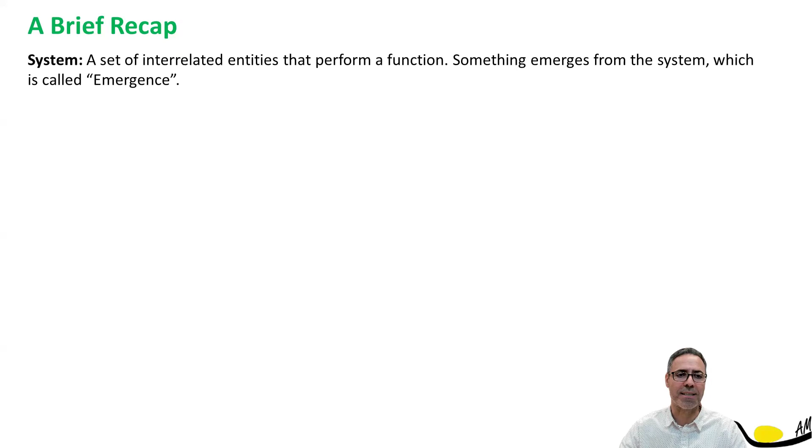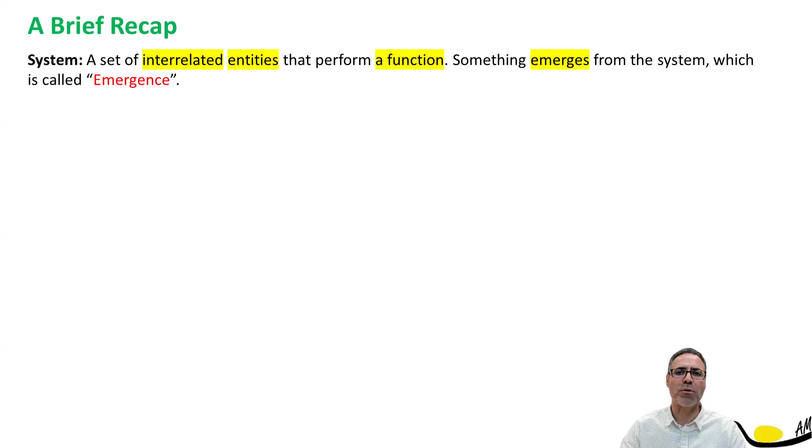Previously, we defined a system. Simply, a system is a set of interrelated entities and components that perform a function. The system does something, something emerges from the system, which we call an emergence. Pay attention to every word in this definition: a set of interrelated components or parts or entities that perform a function, and something comes out of the system, which we call an emergence.

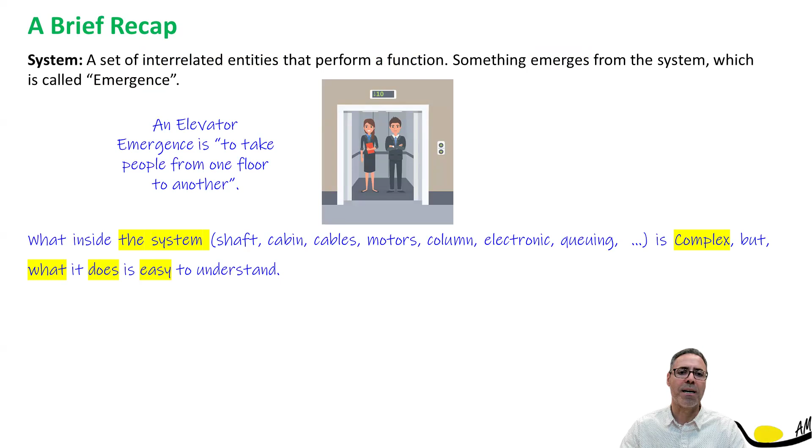A simple example is an elevator. An elevator simply is some components like a shaft, cabin, motors, column, cables, and so on. It's a complex system, but it does something which we can understand easily. The emergence of this system is to take a person from one floor to another.

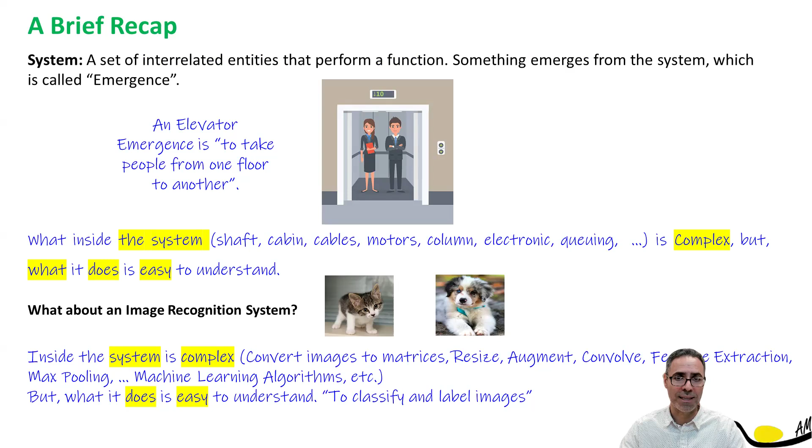Think about a system like an image recognition system. It can recognize cats and dogs images and label them for you. What it does is very simple, to label the images, but what is inside this system is complex. If you've learned machine learning, you know you need to apply convolutional neural networks to do the image processing. There is some math and some machine learning algorithms. But what is important for us is to understand easily what this system does, and later we'll focus on the component that performs that function for us.

But the more important question is, what drives these changes? Perhaps safety, maybe the need for better performance, or maybe new technologies and materials drive us to design a bicycle which is more efficient, perhaps lighter with better and stronger material.

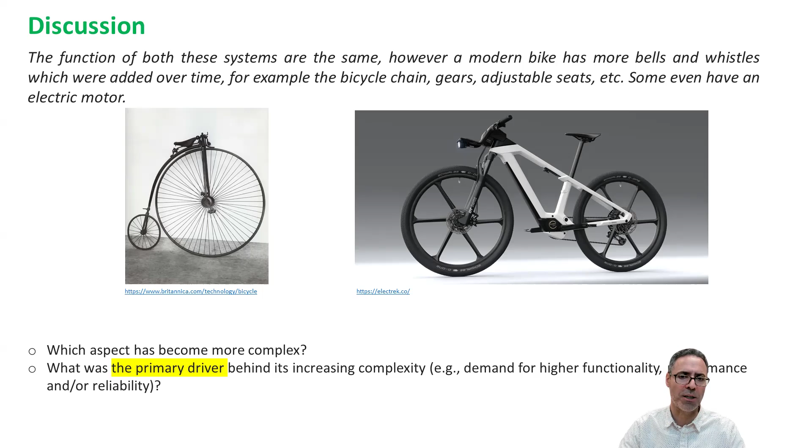Now, can you think about a system that became more complex, and also think about what made it more complex, or what is behind its increasing complexity? I can think about a calculator. The calculator used to do just simple arithmetic, but over time it became more complex. Now they do graphs, trigonometry, and some of them even connect to the internet. I remember my father used to have one of these old calculators and he was happy with that.

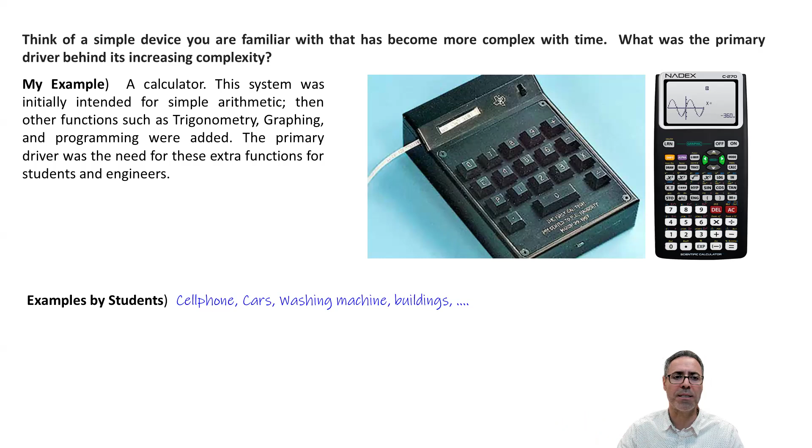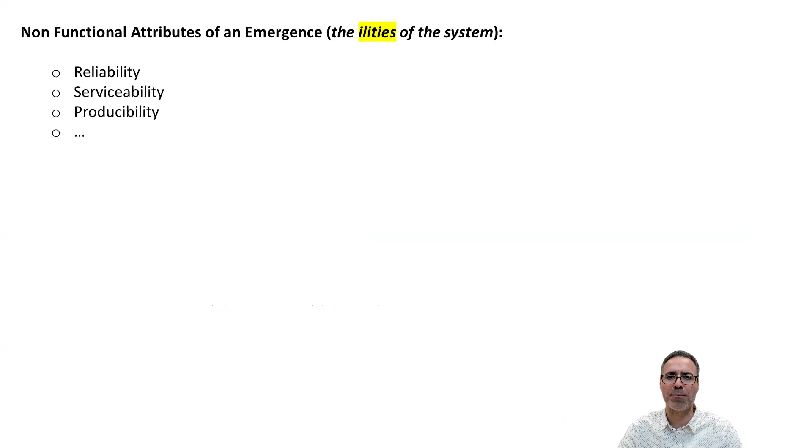So we say there are some 'ilities,' perhaps reliability, serviceability, producibility, and maybe many other ilities, which refer to non-functional attributes that drive us to develop more complex systems.

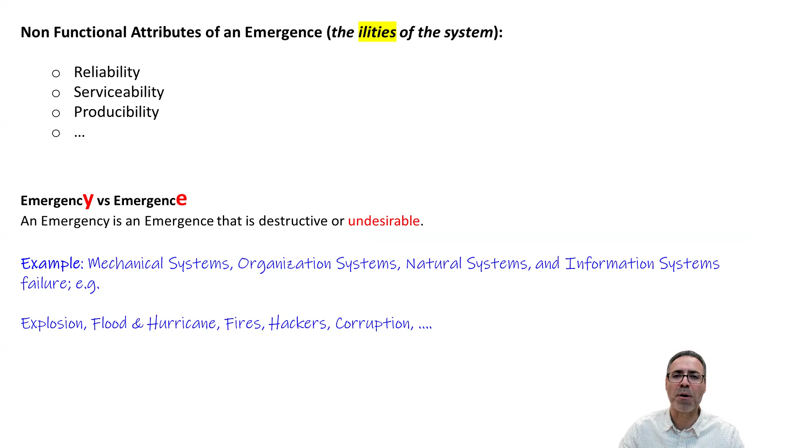Also, sometimes an emergence of a system is something undesirable. We call it an emergency, like an explosion, a fire, or a flood. These are all emergence of a system, but they are not desirable emergence. We call them emergency.

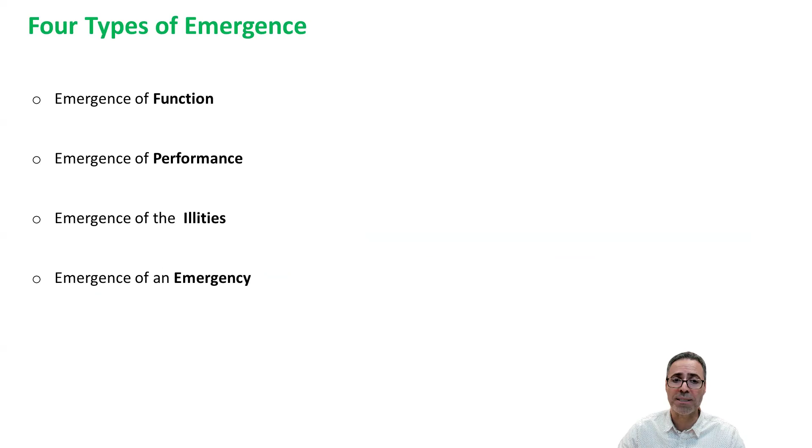So we can summarize, there are four types of emergence coming out of a system: emergence of a function, emergence of a performance, emergence of the ilities, and an emergency. Emergence of a function is what the system does. Performance is when the system does something better than before. Ilities are non-functional attributes like producibility, serviceability, or maybe many other ilities that you can think about. And an emergency is something undesirable.

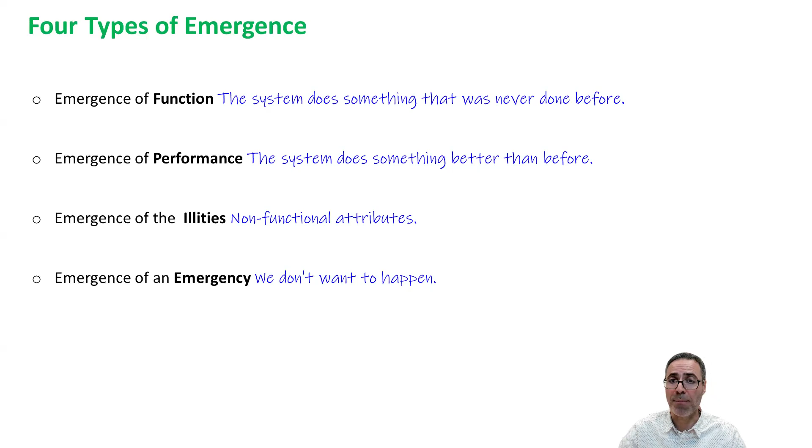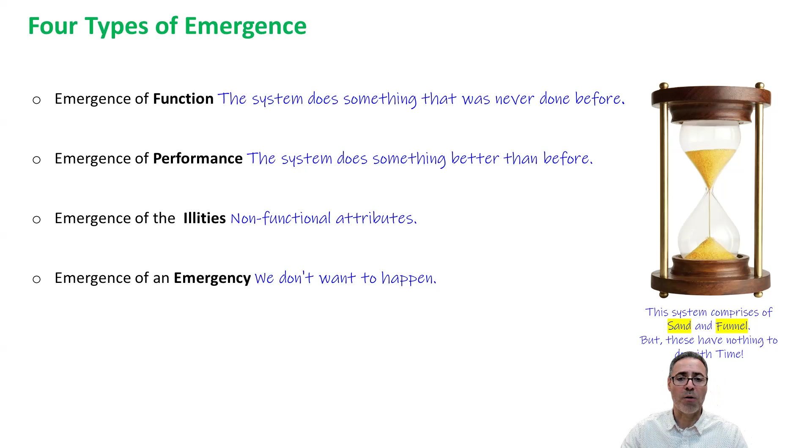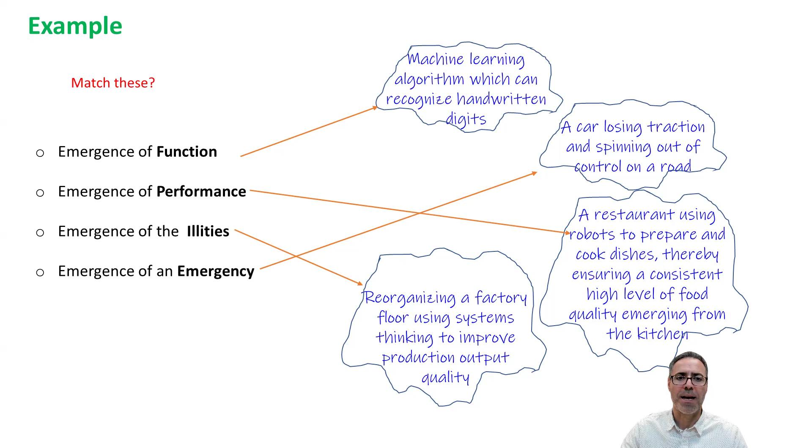Perhaps you can pause here and match any of these four types of emergence to one of these examples. As an emergence of a function, the machine learning algorithm. Performance, a restaurant which uses a robot. Ilities, a factory that uses systems thinking. And an emergency, a car which breaks.

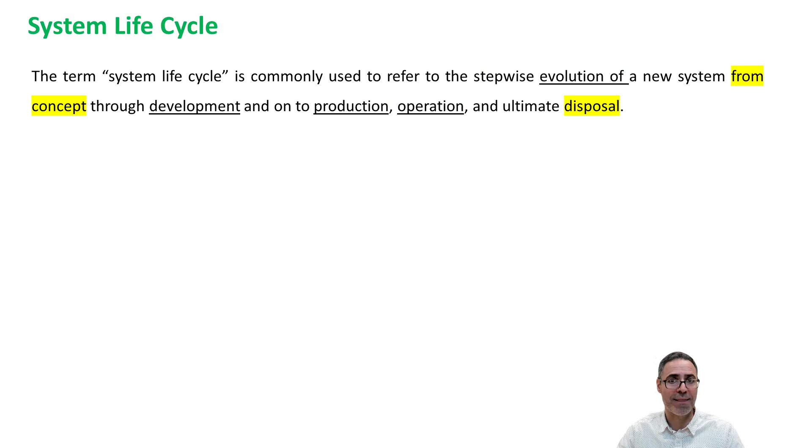Now we're going to look at the system lifecycle, and we're going to come up with models that make a systematic way to model a system from concept all the way to the end, to disposal. So going from a need, convert it into a valid need, develop a concept, then do the design and development, manufacturing and production, operation, launching, upgrading, and at the end, the end of life of a system.

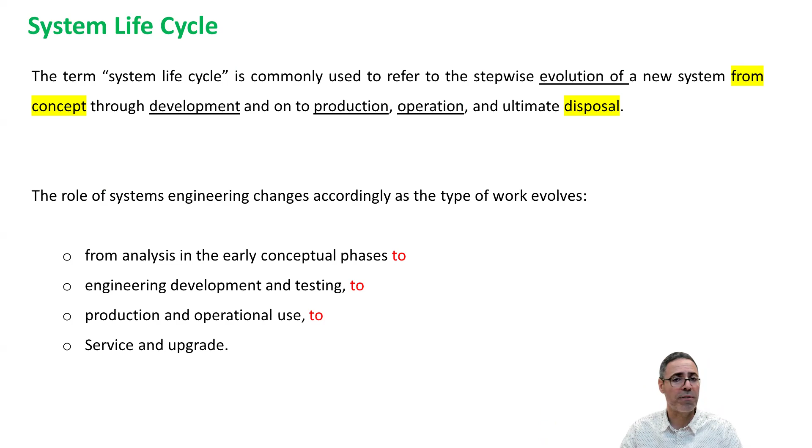The role of a system engineer changes at each of these phases. In the conceptual phase, you need to do the analysis. Going to the engineering development and testing, the focus changes and switches to design development and testing. And at the end, the focus of the system engineer changes to service, updates, maintenance, and others.

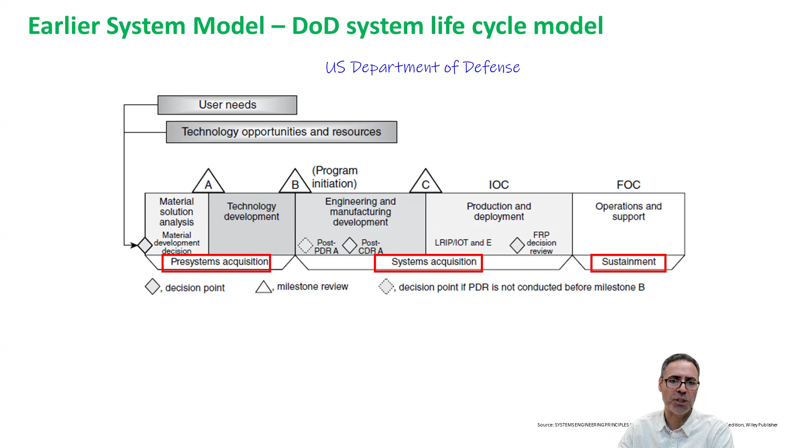The triangle shows the milestones and the diamond shows the decision points. There are some acronyms, as shown at the bottom, like PDR, the preliminary design review, the critical design review, and so on. This is a good model that you might adapt for developing any system, and it's easy to understand.

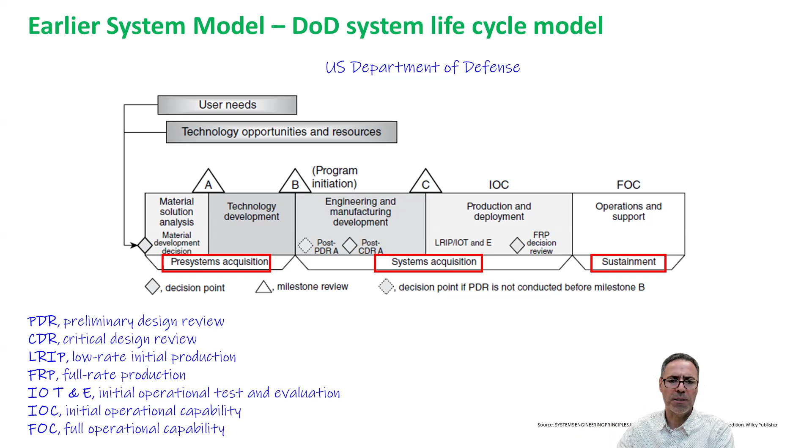But today we are going to focus more on what's a common system development model, or system development life cycle, which has three main stages. The first stage is concept development. The outcome of this stage is to develop a concept to satisfy a valid need.

Moving on, the second stage is design and development, or the engineering development. The outcome of that is a validated physical system design - something where we've done the detailed design, done the tests, and validated it. So we are ready to move to the third phase, which is production. We manufacture the system, launch it, deploy it, and then provide maintenance, updates, and other services required for the system.

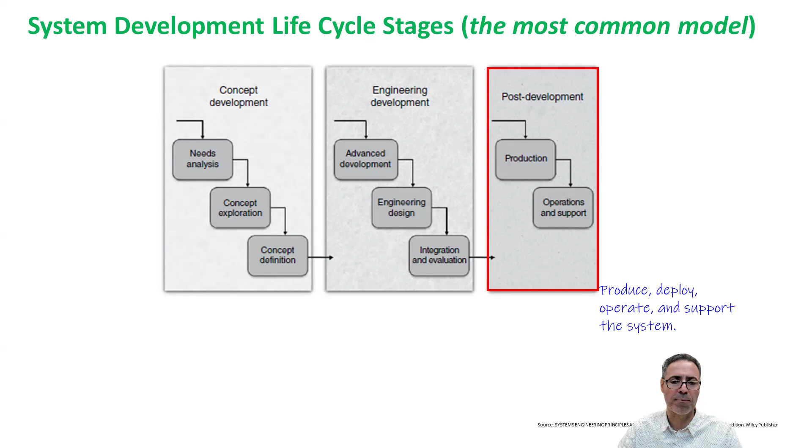Another way to look at those three phases, which we refer to as principal stages, is shown in a diagram like that. So we see the concept development, the engineering development, and the post development - the three main stages or principal stages.

Look at the arrows at the top. Those arrows show the flow of information. They start with the need and move to the functional specification, then production specification, and then some documentation regarding maintenance and so on. The arrows at the bottom show the steps going from an opportunity, or a concept, all the way to a physical actual system that operates.

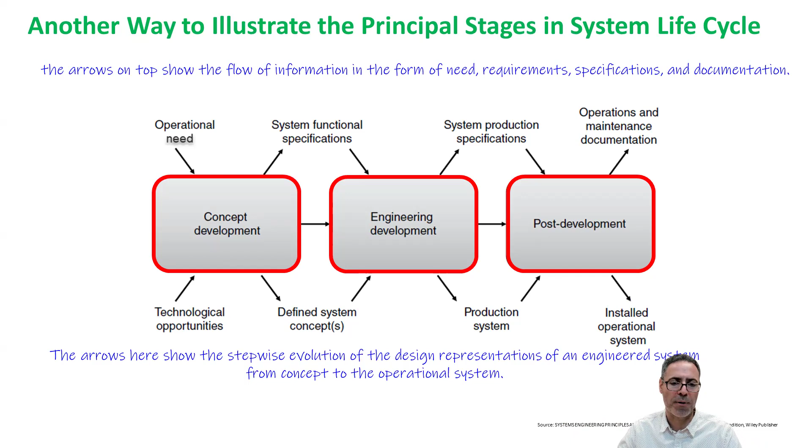Let's look at one example. Let's say there is a need for a new commercial aircraft. Perhaps we need an aircraft that moves faster, or maybe a new technology is available - a new material, or perhaps a new engine.

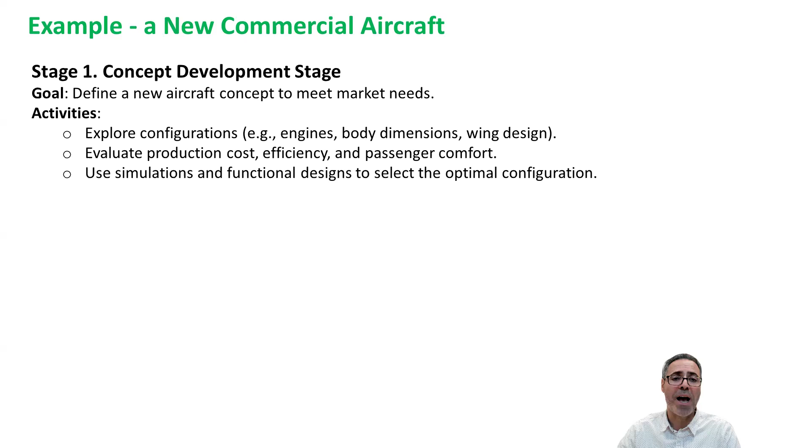So there is a need to develop a new aircraft. Stage one is the concept development stage, so we define a new aircraft concept to meet the market needs and requirements. Our activity here is to explore different configurations - the number of engines, the size, the shape of the wings. Also, we need to evaluate the cost of production, the efficiency, the passenger comfort, and maybe do some computer simulation and 3D modeling. Let's say this fancy concept is the outcome of stage one.

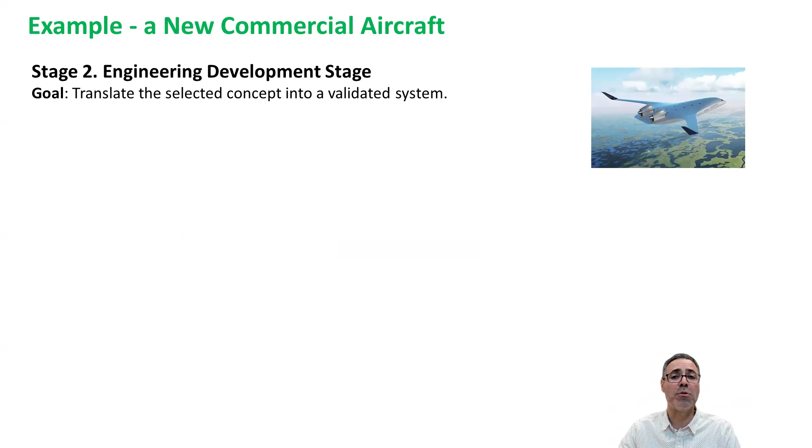Now we move on to stage two, the design and development stage. At this stage, we need to translate our concept into a validated system. It means we need to validate that the new technology works.

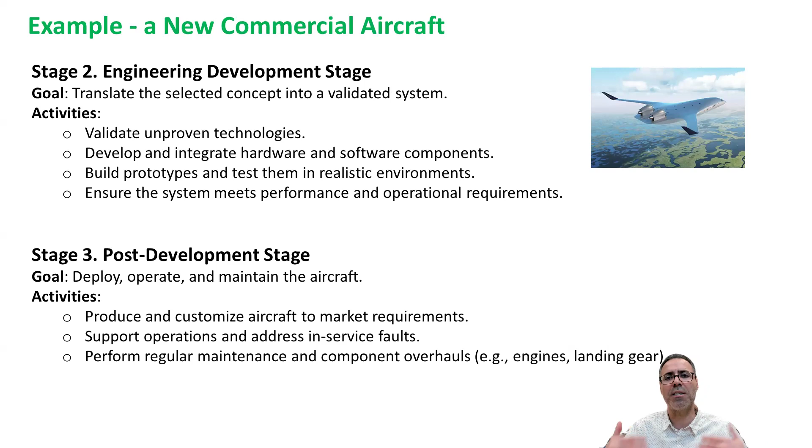We need to develop detailed designs, maybe build a prototype, and do some testing. After that, we move to the post-development stage. After we've done the test, built a prototype, and done the improvement, we deploy our product, check its operation, and check consistently and frequently its maintenance to do the upgrade and optimize the components we need. So as you see, these are the three stages for a simple example like aircraft, how it works.

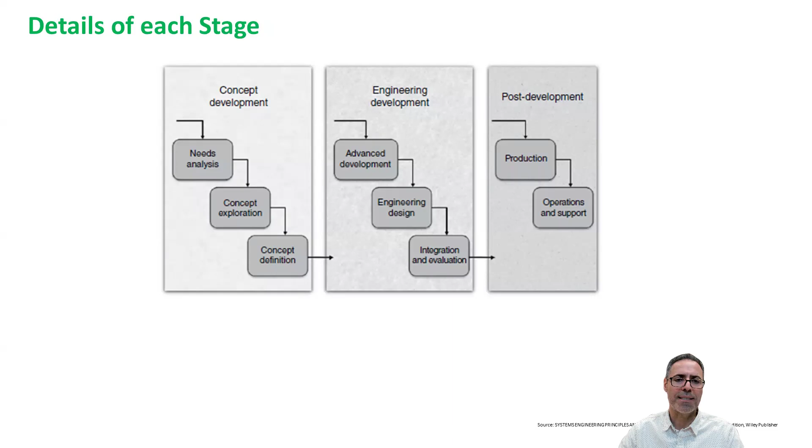Now let's focus a little bit on details for each of these stages. For the concept development, we have needs analysis, concept exploration, and concept definition. Let's start with the need analysis to make sure that the need is a true need. Then we move to different concepts - the more concepts we explore, the better. Then we narrow down our list and decide and fix on one concept.

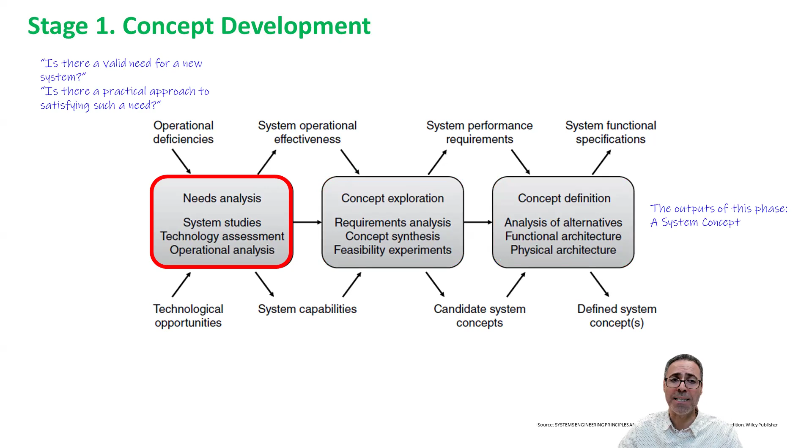So the outcome of the need analysis is to ask: is there a valid need for a new system? And if there is a valid need, is there a practical approach to it? Let's say there is a need in society for an automatic separator garbage bin. Is there a real need? Yes, there is - perhaps you are stuck in front of one of these garbage bins trying to decide which hole to put the garbage in. You have to read through and make a decision.

But what if there is a garbage bin that does all the job for you? There is just one hole, like this blue hole, and you put the garbage there and it sorts it out and puts it in the right bins. Maybe the technology isn't out there yet, and maybe one of you can start thinking about how to implement it. Should I use image recognition, where a camera takes photos and then sorts the garbage to the right bin? Or maybe a camera and image recognition isn't efficient, and there are other ways. Think about a technology that can solve this problem. So the need is there, but maybe the technology isn't yet, or maybe it is and you can think about it.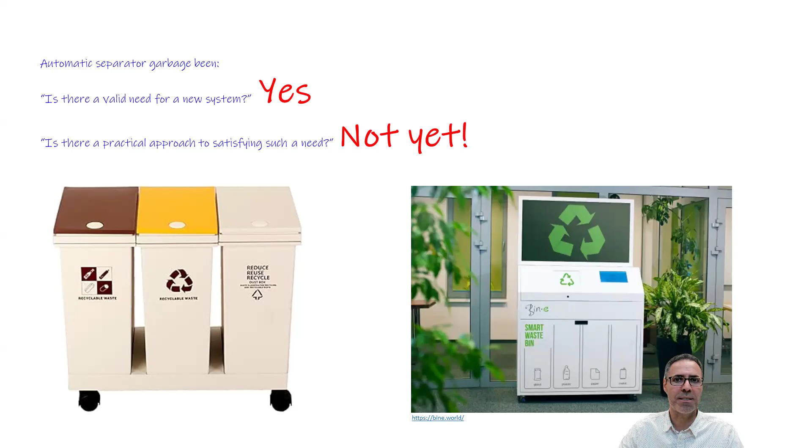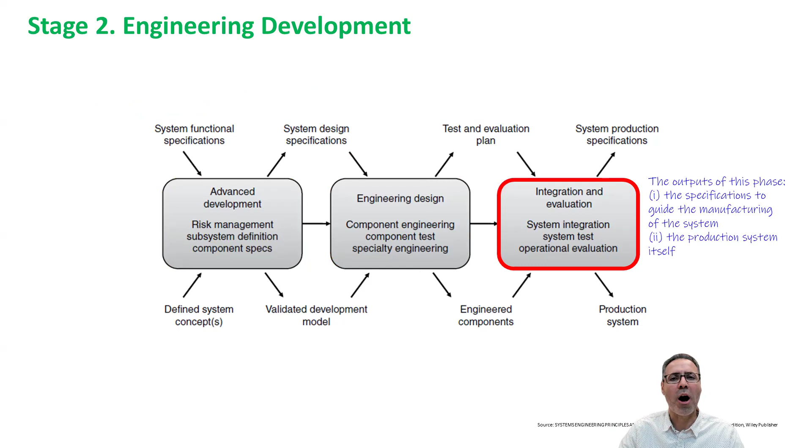Now let's move to the engineering development, the second phase. In this phase, we focus on one concept, we focus on detailed design, we build the prototypes, and we do the testing. So we do test and evaluation to optimize our design and prototype. The outcome of this phase is the specification, which guides the manufacturer to start building the components.

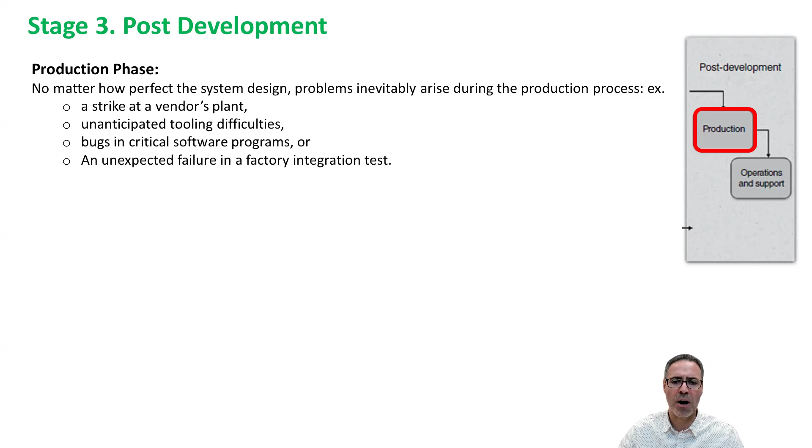Moving to the next phase, let's say we launch our product. Now it's a matter of mass production. We have to be aware of Murphy's Law - remember in lecture 1 we talked about it? Things may not go as we plan. Maybe there's a strike, an issue with tooling, critical software bugs, and many other unexpected things that can happen. I'm sure you have many examples in mind.

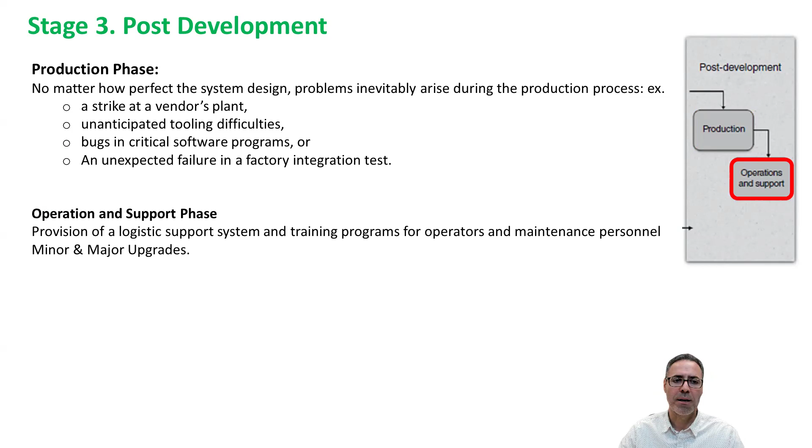Now it's the operation and support phase. We need to think about the service, and we need to think about some minor or major upgrades that our system needs. Now we want to move from abstract to actual components.

Perhaps this table can guide us through. Remember in lecture 2 we talked about the levels - we break down a system into subsystem, components, subcomponents, and parts. Now you can apply the concept development and engineering design and development for each level. For example, for the need analysis, maybe you have to go to the system level, but at the subsystem level, you'll focus on defined requirements and defining function. And at the component level, just focus on the function.

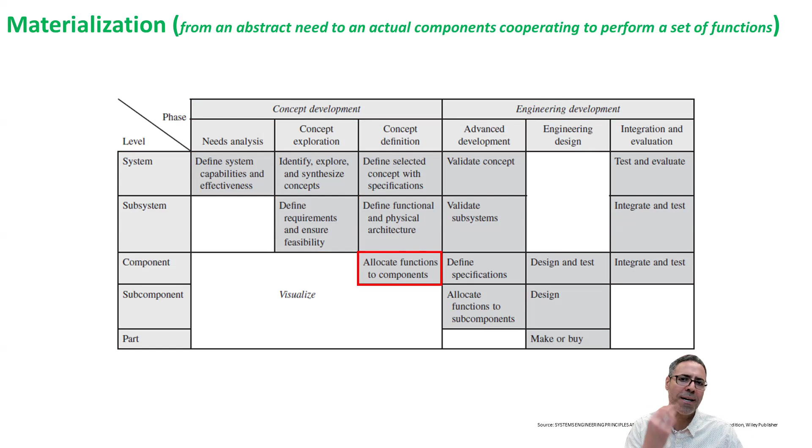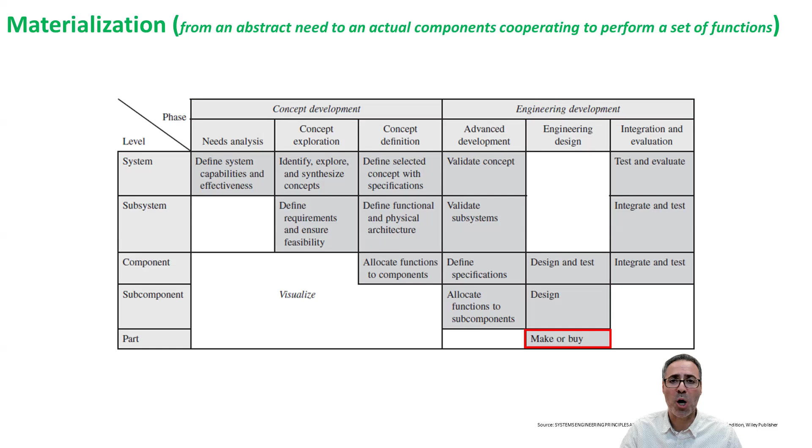Of course, in concept development, there's nothing to do regarding the subcomponents and parts - perhaps you just visualize how the part may look at this stage. But moving on to engineering development and design, for the subcomponents you need to focus on allocating a function to subcomponents and focus on the design. And regarding the parts, there's nothing for other sections, only to make the part, or maybe you can buy it off the shelf.

This table is an example, maybe more applicable to aerospace system development for airplane examples. The y-axis shows the level of engagement for a system engineer, a test engineer, a design engineer, and so on. In concept development, design engineer involvement is a little, but moving on to engineering development, the height of development is higher for the design engineer.

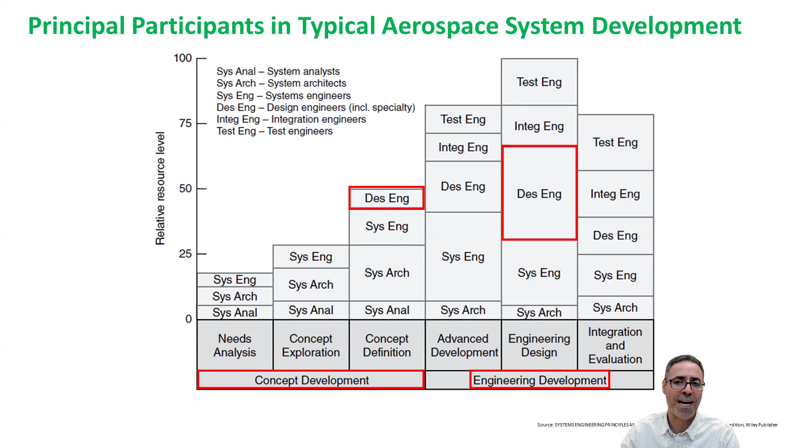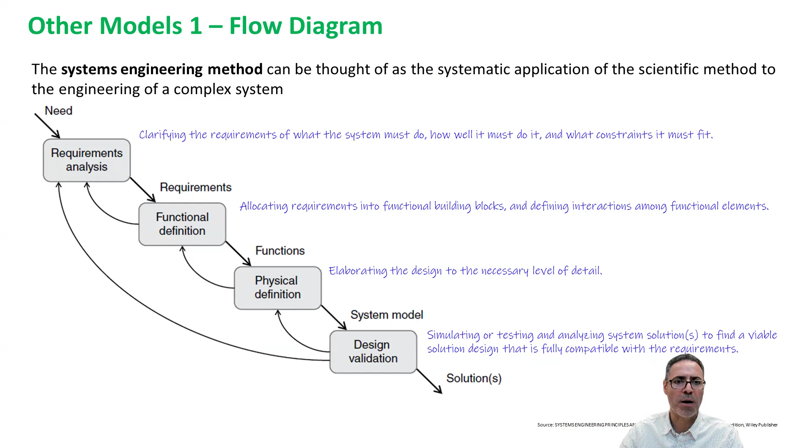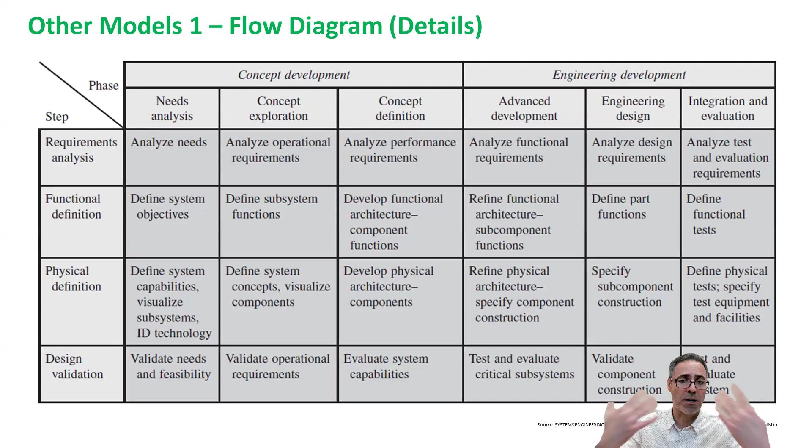That flow diagram, now with more details, is shown in this table. I want you to pause this video and go through more details and more cells on this table. On the first column you see these four boxes: requirement, functional definition, physical, and design validation. Now you see the concept development and engineering development we discussed in the classic model, and how they are related to each other.

The second model, which is also very common, is the spiral life cycle, and again this is very similar to model one. If I show the four segments of this, you see requirement analysis, functional analysis, physical, and design validation. This model emphasizes more the iterative nature, that at each stage we keep repeating, analyzing the requirements, the functions, and the detailed design until we get to that optimum design.

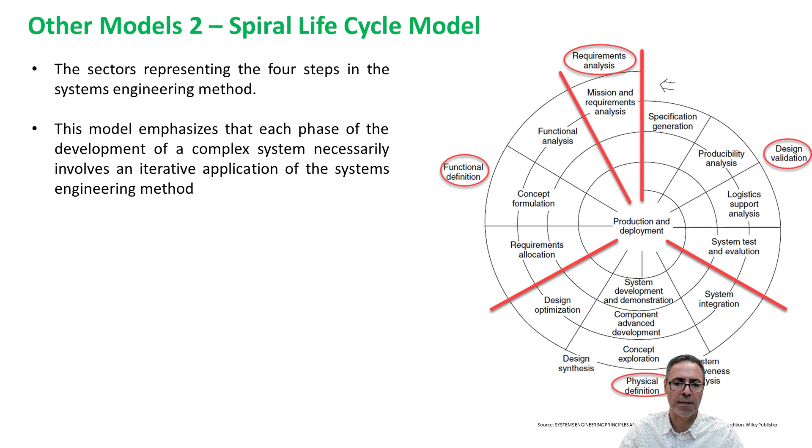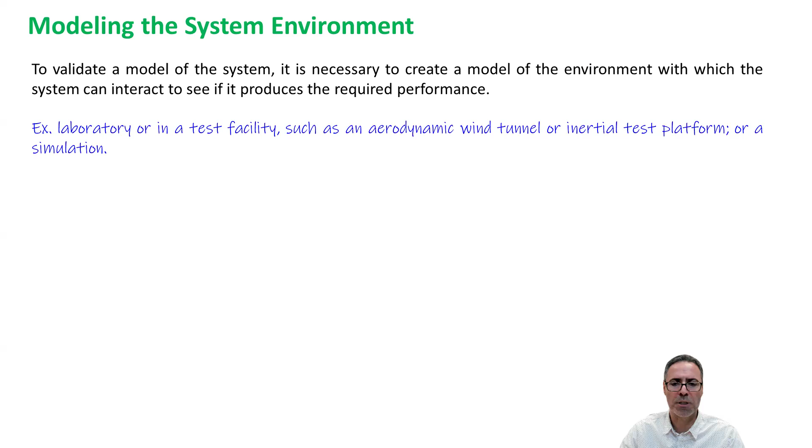One last thing we need to consider is the environment. Our system works within an environment - if it's a submarine, it works in the deep ocean; if it's an airplane, it works in the air or space, and so on. So I need a good simulation of the environment. Maybe I can use a wind tunnel for an airplane, but for the deep ocean, perhaps I need another kind of simulation.

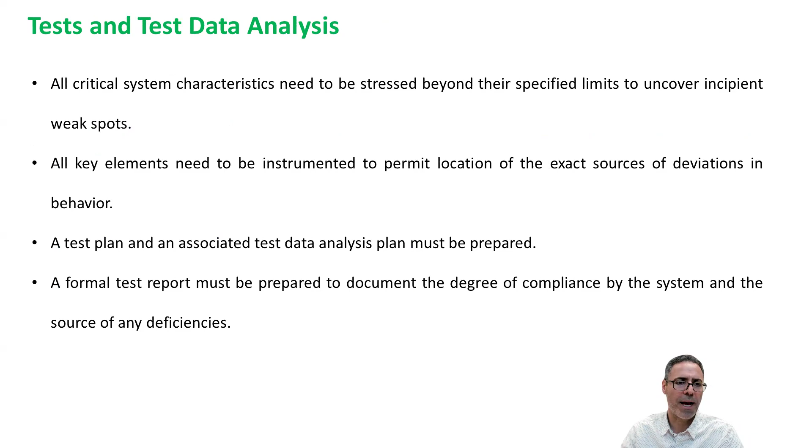After that, we will do the test and analysis. We will push the boundaries when we do the test, to stress the components beyond their capabilities. This is to realize if there is any incipient weak spot we can recognize. We do the tests and record everything, obviously.

Let's summarize what we discussed. There are three phases or stages of the system engineering life cycle for any system, starting with a valid need that we plan to materialize. These three phases are concept development, engineering development, and post-development. Within each stage there are three phases. With concept development, we analyze the need, explore different concepts, and define one concept that we believe works best. Then we move on to the second stage, engineering development.

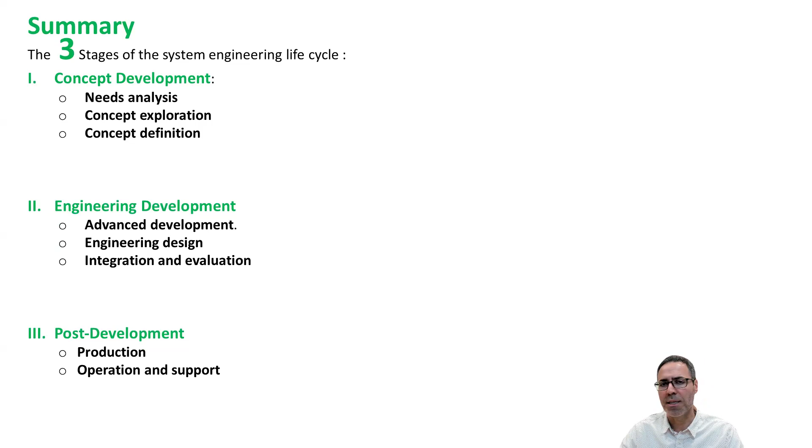We will do the advanced development, meaning detailed designs and engineering design, then do the integration and evaluation by doing tests and prototyping. Then we'll move on to production and perhaps other services during the launch and operation, like the training we have to do for the new system, maintenance, and perhaps some upgrades. I'll provide more details here - you can pause the video and go through them, but basically this is what we discussed during the lecture.

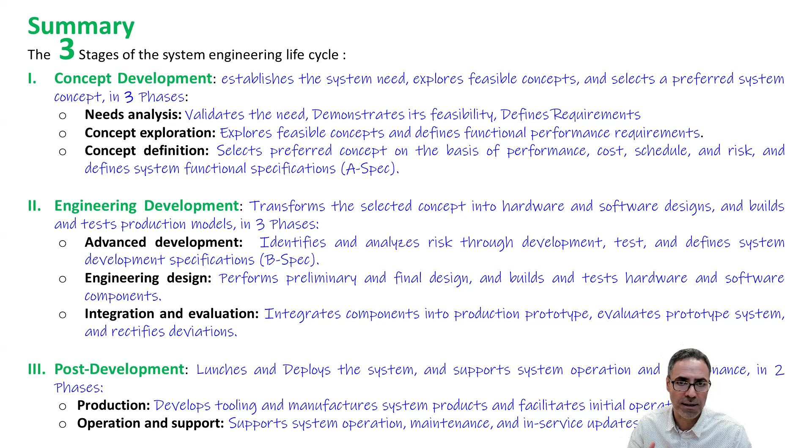What I want you to do: think about a system, maybe a simple system, and see how you can apply these three phases and sub-phases to your system of interest. Thanks for listening.